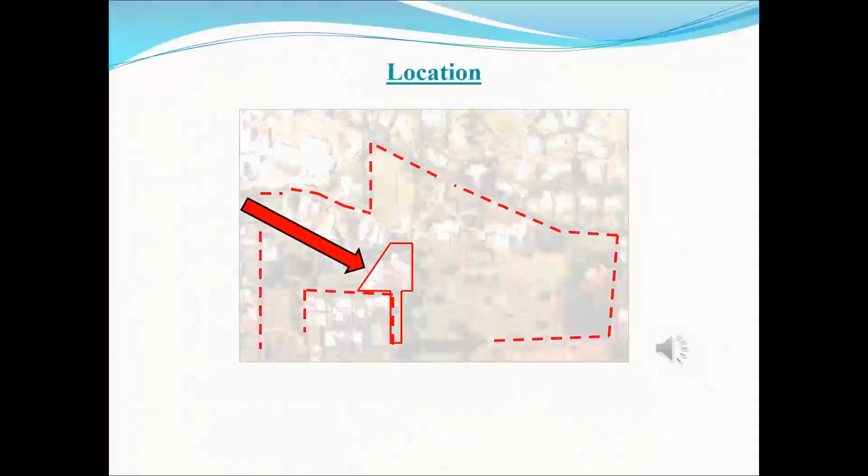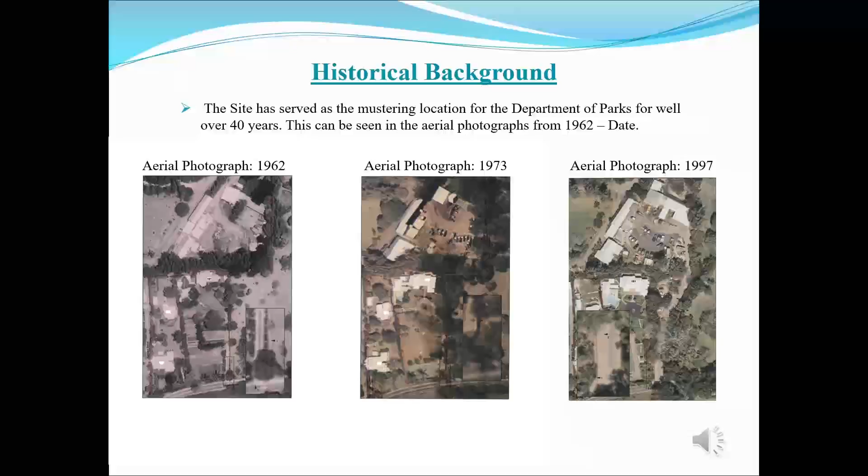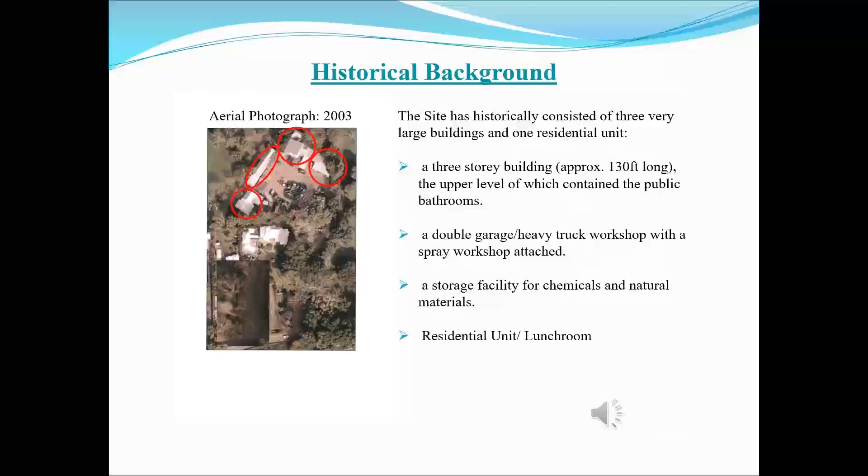The proposed works will take place within the Botanical Gardens, within the same footprint of the maintenance facilities that were demolished in January of 2013. This site has served as the mustering location for the Department of Parks for well over 40 years, clearly evident in aerial photographs from 1962, 1973, and 1997. The site historically consisted of 3 very large buildings and 1 residential unit: one 3-story building of approximately 130 feet in length which housed public restrooms on its uppermost level, a double garage and heavy truck workshop, a storage facility for chemicals and natural materials, and finally the residential unit and lunchroom for the Department of Parks staff.

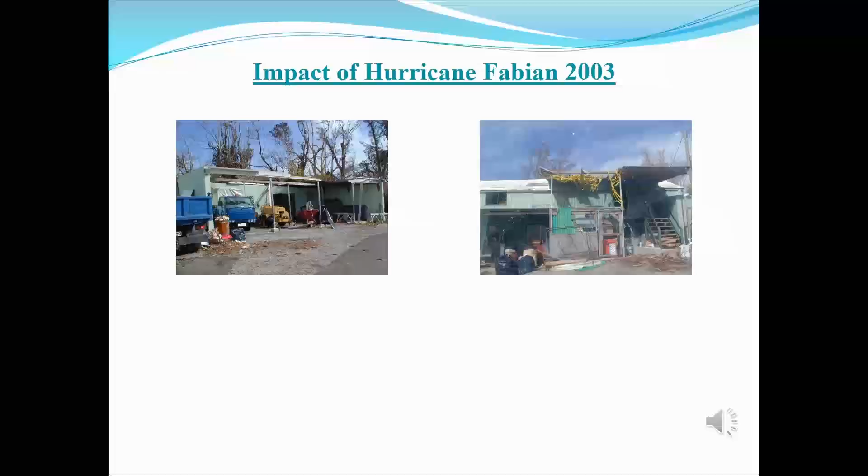In 2003, the maintenance yard was severely damaged by Hurricane Fabian. An assessment of the buildings found that their integrity had been compromised, and the department soon thereafter began the process of refurbishing the maintenance yard. The Department of Parks seeks to replace the facilities within the Botanical Gardens which were damaged during Hurricane Fabian.

These facilities will serve as the main hub for the Department of Parks' staff. The maintenance yard will have the following features: the construction of 1 new 2-story building, 1 new single-story building, a new parking facility for 16 cars and 20 cycles, a 20-foot-high above-ground water tank, and a vehicular washdown area with accompanying biopit and swale.

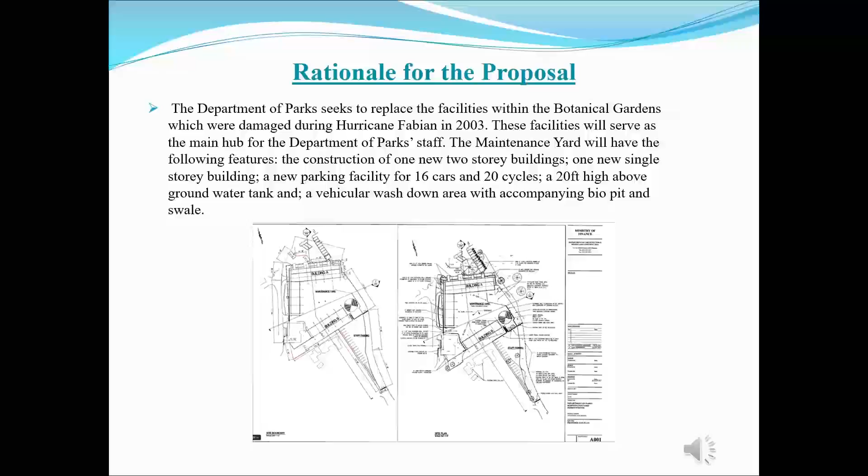The design objectives for this proposal are to provide a safe and secure yard for all of the Department of Parks' maintenance personnel, to supply adequate material and equipment storage in accordance with all safety and health requirements, to maximize the use of the limited space within the site for all uses, to allow for the efficient functioning of the department, to provide an efficient marshaling yard and operations area for maintenance crews, to supply both potable water and irrigation supply for the maintenance staff and the Botanical Gardens, and finally to investigate different methods and technologies to construct the proposed buildings in the most cost effective manner possible.

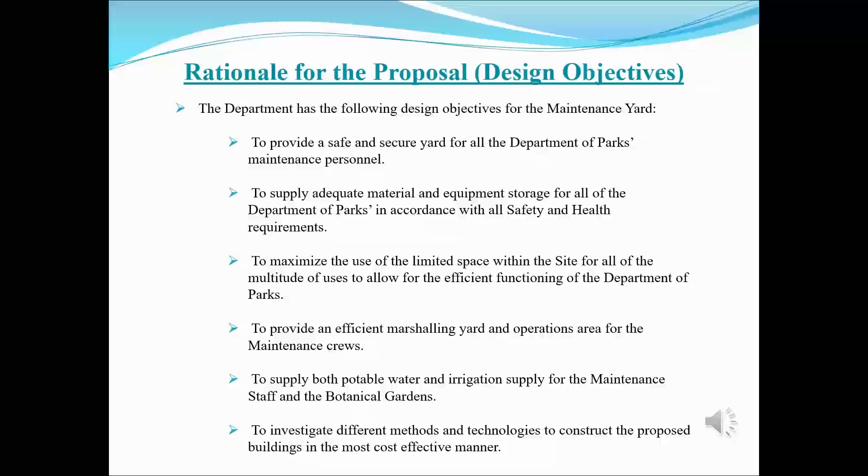The Department of Parks has conducted a comprehensive analysis to look for an alternative location to the maintenance yard. Unfortunately, no viable sites were found that were central, adequately sized, and zoned for industrial use. The department did investigate utilizing a portion of Mills Creek Park, yet it was found that the difficulties this site presented in terms of managing the Western crews, security, and lack of proximity to the administrative staff made this location less favorable than the existing site.

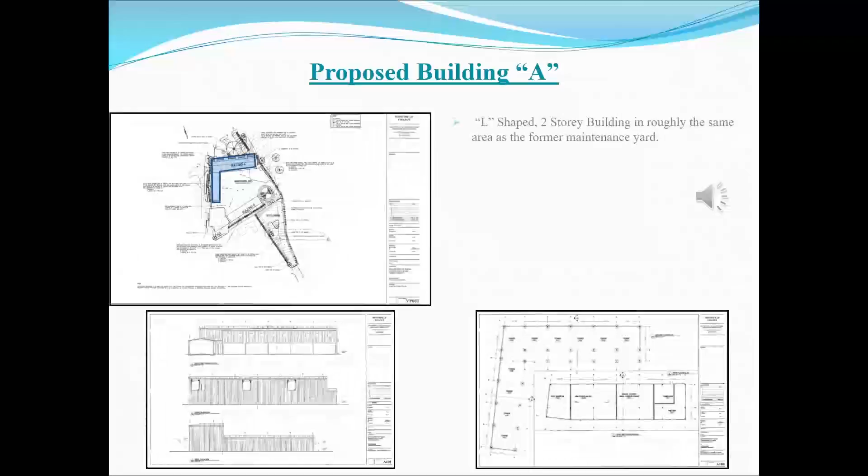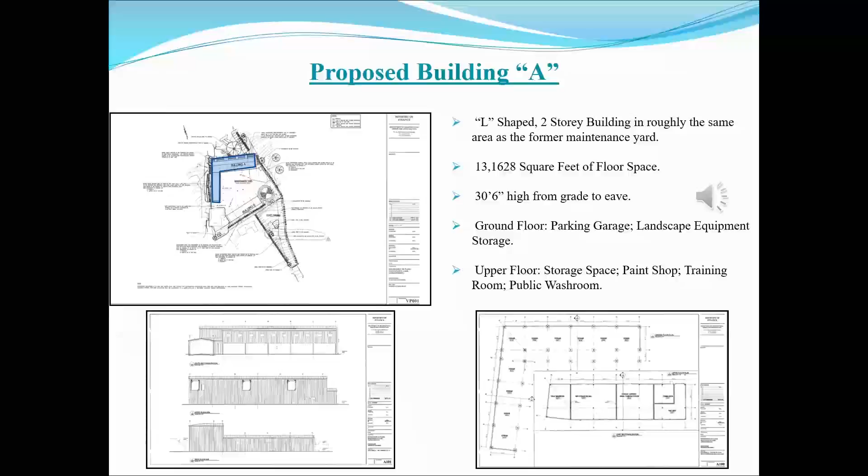The first element of the maintenance yard to be discussed is the proposed Building A. This is a 2-story building of approximately 13,000 square feet, which will stand at 30 foot 6 inches from grade to eave. The ground floor, accessible only from within the maintenance yard, will consist of a multi-bay parking garage and landscape equipment storage. The upper level will consist of additional storage space, a paint shop, training rooms, and a public bathroom which may be accessed via the adjacent parking lot.

Building B is a single-story truck storage facility consisting of a total of 3,245 square feet. This building will be 18 feet high from grade to eave and will be capable of housing 5 heavy trucks at one time.

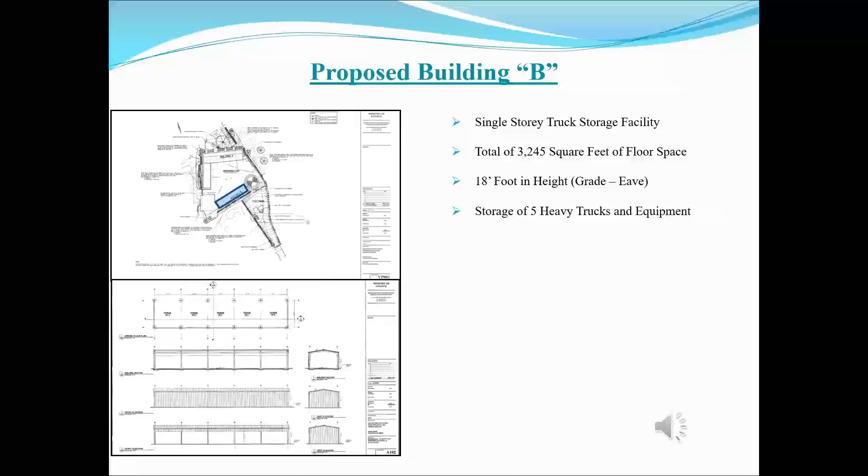The proposed refurbishment of the maintenance yard seeks to maintain the 2 existing access points to the site. The first leads to South Road Paget and allows for the efficient dispersal of Parks crews both east and west to the numerous properties maintained by the department. The second access point is to the west of the site and leads to an internal Botanical Gardens service road. Both of these access points will be gated to ensure that only authorized personnel may access the site.

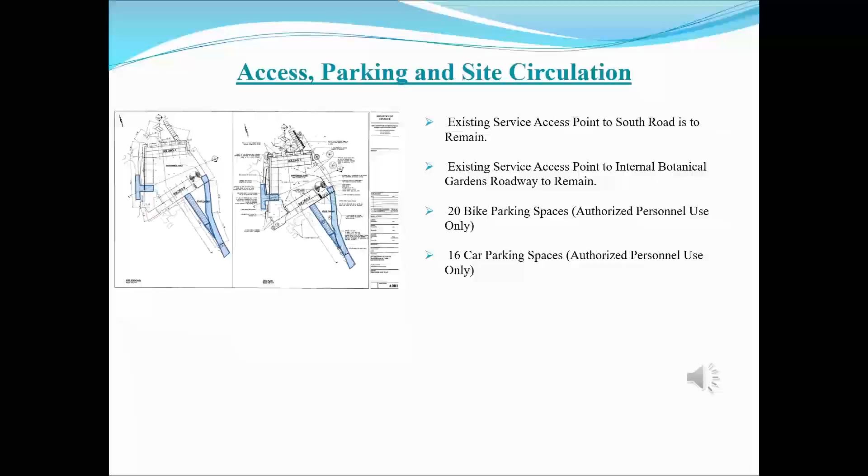The proposal also includes 20 bike and 16 car parking spaces for park staff to utilize to the south of Building B. The above-ground water tank, which is 20 feet high, 39 feet in diameter, and capable of holding 124,000 gallons of water, is situated to the northeast of the proposed parking area, but at a lower grade than the proposed buildings. Water collected from the roofs of the two new buildings will be gravity-fed to the tank. A water filling station is to be situated at the base of the tank.

A vehicular washdown area with accompanying biopit and swale is proposed at the eastern end of Building A. There are 2 planned boreholes in the center of the site to capture rain runoff. The Belco vault is to be relocated to the west of the proposed Building A, with substantial vegetation screening it from view.

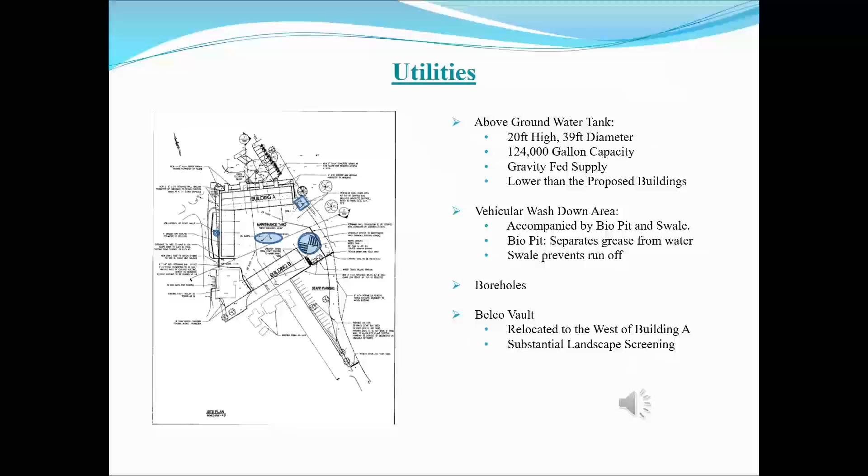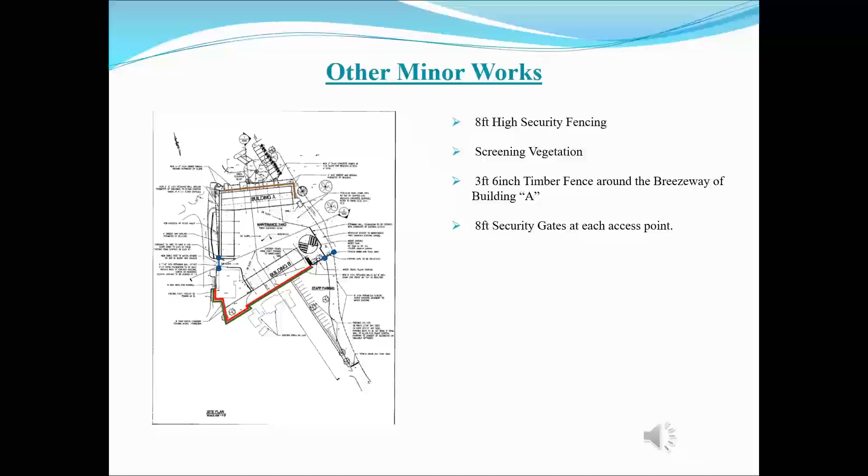There are a number of other minor works proposed for the maintenance yard. These include 8-foot-high security fencing to the south and east, screening vegetation to accompany this fencing, a 3.5-foot timber fence around the breezeway of the proposed Building A, and 2 8-foot security gates, one for each access point.

The vegetation plan proposes that a number of existing trees surrounding the site remain, and marks others for removal. To increase the visible screening of the site, numerous new trees are to be planted, and the plans highlight the proposed removal and replacement of hedges surrounding the site. The intent is to ensure that the site is fully shielded from view, as was the case prior to Hurricane Fabian.

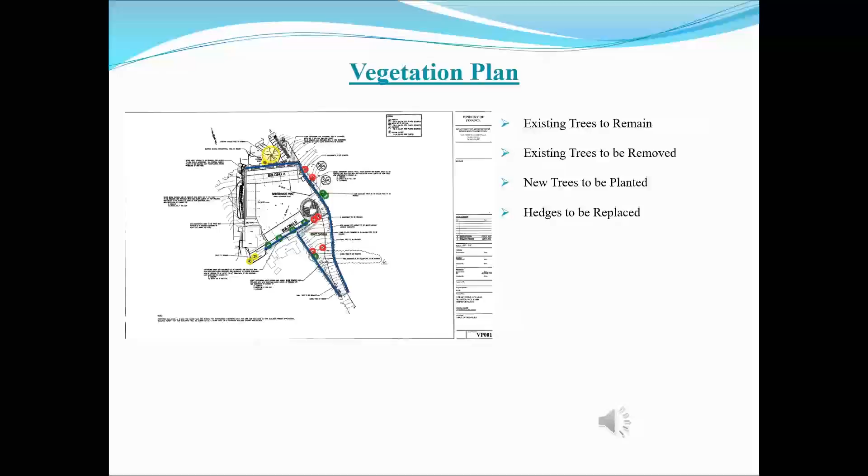This concludes the PowerPoint presentation for this public consultation on the refurbishment of the Department of Parks' maintenance yard. Please feel free to complete one of our comment sheets so that we may learn of your views regarding this consultation. Thank you for taking the time to participate, and we within the department look forward to taking your views into consideration.